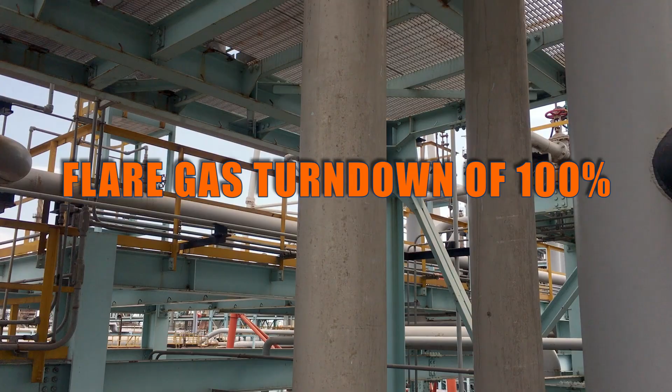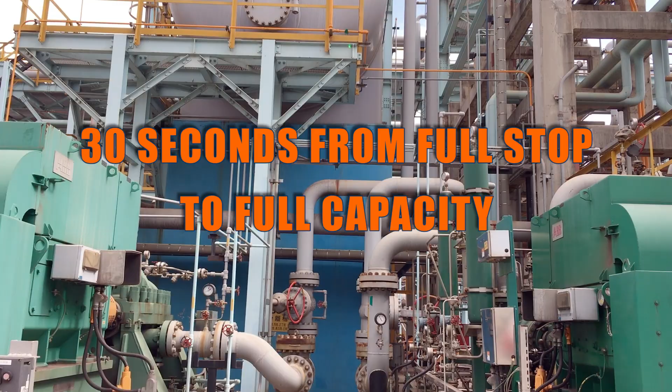Would you choose the Hijet system again? Yes, if I had the chance, I would choose the Hijet system again. You feel like your refinery made the right choice in choosing it? Yes, I think we made a good choice.

Would you recommend the Hijet system to other refineries that need flare gas recovery? Yes, I think the Hijet system is a good system. Easy to operate, no maintenance. Have you been able to achieve zero flaring, zero emissions? Yes.